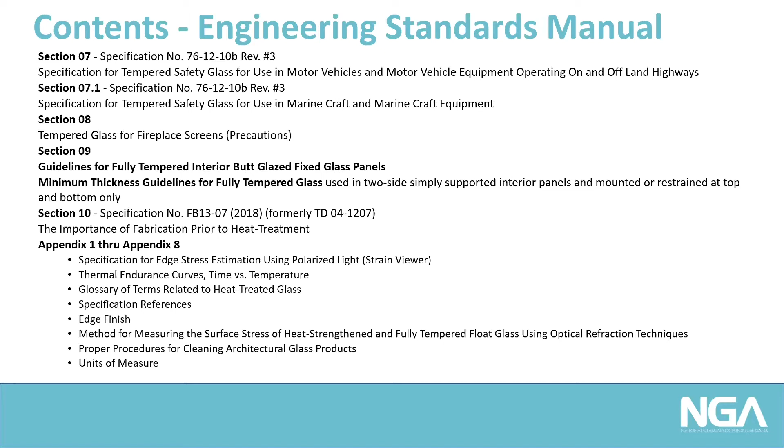The second document to be updated in late 2019 was the Heavy Glass Door Design Guide. Per NGA, the purpose of this design guide is to provide authoritative technical information to designers and to offer some suggestions as to the proper application of heavy glass used in doors and entrances. The last publication of this document is from 1999. After nearly 20 years of task group efforts, the document was updated in 2019.

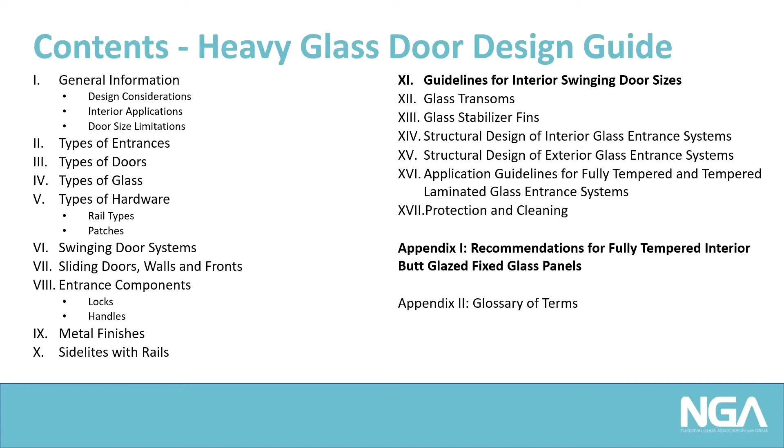So, what were some of the more significant changes to the documents with respect to today's topics, the tech tables? In the Engineering Standards Manual, 2 tables were combined into 1. In this table, joints joined with silicone or permanent clips and open joints are addressed side by side. The deflection criteria for glass linked with clips or silicone joints is now based on 1.5 inches for glass up to 10 feet tall and 2 inches for taller glass.

I have been told the deflection criteria in the previous version was 1 inch. Unlike this version, the deflection criteria was not explicitly defined in that document. Glass linked with clips or silicone joints was reviewed for both the 5 PSF load from IBC 1607 and the 50 pound per lineal foot at 42 inches above finished floor from IBC 2407. Table 1 of the previous edition was based only on the 5 PSF load.

Glass with open joints was reviewed for both 5 PSF load from IBC 1607 and the 50 pound per lineal foot load from IBC 2407. Table 2 of the previous edition was based only on the 50 pound per lineal foot load.

In the Heavy Glass Door Design Guide, laminated glass with patch fittings is now allowed in limited conditions per a footnote. This edition is based on the results of collaborative industry testing. Laminated glass with standard PVB, structural PVB, and ionoplast interlayers were tested and have been deemed acceptable for temperatures of 75 degrees Fahrenheit or less. Additionally, hardware limitations for 5/8-inch glass doors were added to Table 4. The previous table included hardware limitations for 3/8, half, and 3/4 inch glass doors.

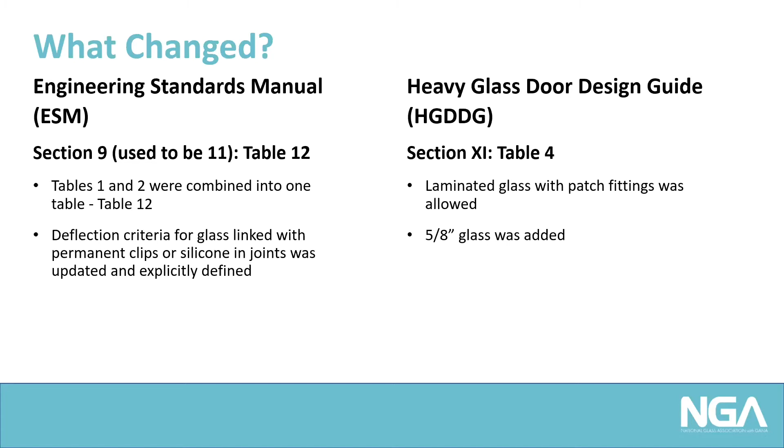Why were these changes made? Well, in Section 9 of the Engineering Standards Manual, the committee made changes in order to define applicable code considerations, provide clarification regarding calculations related to the tabulated recommendations, and to reduce the risk of misuse of tables by combining the information into one table. The tables from the previous document were sometimes being misused, particularly with respect to the open joint condition.

There was a common misconception that GANA recommendations could be used in lieu of BOCA or IBC codes. GANA always noted Table 1 did not meet 2400 of BOCA, which has been replaced by IBC as the model building code. And the intention always was that Table 2 would be used when considering open joints. The designer or user was never intended to make a choice between GANA recommendations and the building code requirements, because they were actually the same in Section 11 of the previous publication.

Table 4 of the Heavy Glass Door Design Guide was updated because there has been an increased demand for laminated glass in interior spaces. Whether for security, acoustic considerations, or other reasons, architects and owners have wanted laminated glass walls and doors. In the past, due to the compressive nature of patch fittings, laminated glass was discouraged or just not offered. After review of the laminated glass and patch fitting test results, the task group members determined laminated glass with patch fittings would be acceptable in temperature-controlled environments.

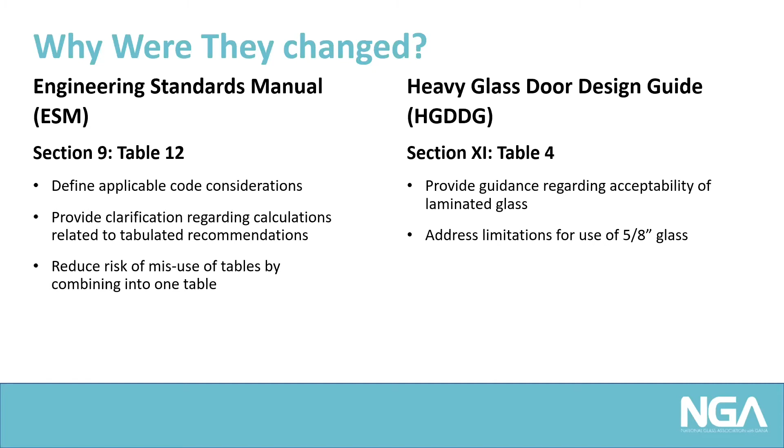What has not changed in these tables and documents? The intent of the recommendations in the Engineering Standards Manual has not changed. When considering interior glass linked with permanent clips or silicone in joints, silicone still cannot be assumed to reduce the deflection or the stress in any panel. Silicone in joints should not be assumed to add to the structural strength or the rigidity of any panel.

The document recommends the panels be clipped together at no more than 4 feet on center to be considered to prevent relative movement between panels. An option does still exist to provide open joints of a width that does not allow fingers to be inserted or trapped.

As before, any open joint between 2 adjacent panels, whether between a door and a sidelight or between 2 sidelights, should still be reviewed for IBC 2407, load of 50 pounds per lineal foot at 42 inches above the finished floor, using a deflection limit of the thickness of the thinnest panel. The previous Table 1 of the GANA Engineering Standards Manual was never intended to be used for open joints.

Table 1 and Table 2 from the previous publication were combined in a side-by-side manner in the new Table 12 in order to present all necessary considerations in one place to ensure that the glass thickness is properly determined. The intent did not change, just the format.

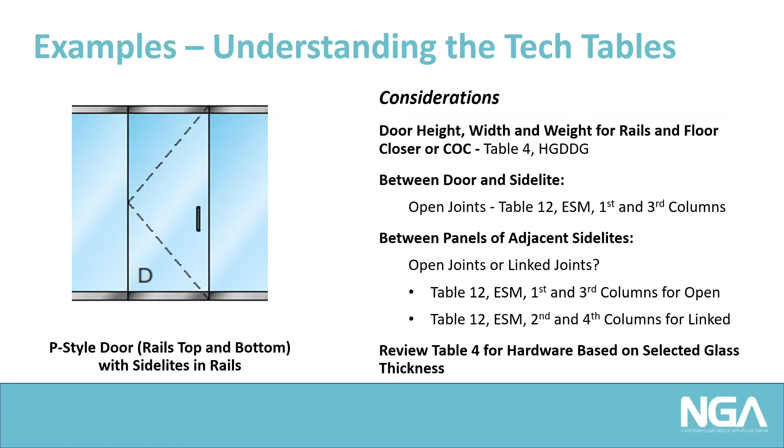Determine the glass thickness for the door and adjacent side lights by finding the worst case thickness in the first and third columns in Table 12 of the Engineering Standards Manual. As with the previous example, if the opening includes a run of side lights beyond the area of the door and you want to consider using a different glass thickness there, review the joints between the adjacent side lights for the height of the opening. Again, refer to the first and third columns of Table 12 in the Engineering Standards Manual if these joints are open. Refer to the second and fourth columns of Table 12 if the joints are linked.

Once again, the glass thickness for the open joint condition between the side light and the door, once this thickness is determined, you should go back to Table 4 of the Heavy Glass Door Design Guide and review the hardware limitations based on the selected glass thickness from the previous steps. If everything still checks out and the patch fitting and closer configuration from the original design works for the glass thickness determined above, you're done. Otherwise, you will have to review Table 4 for an appropriate door and hardware configuration.

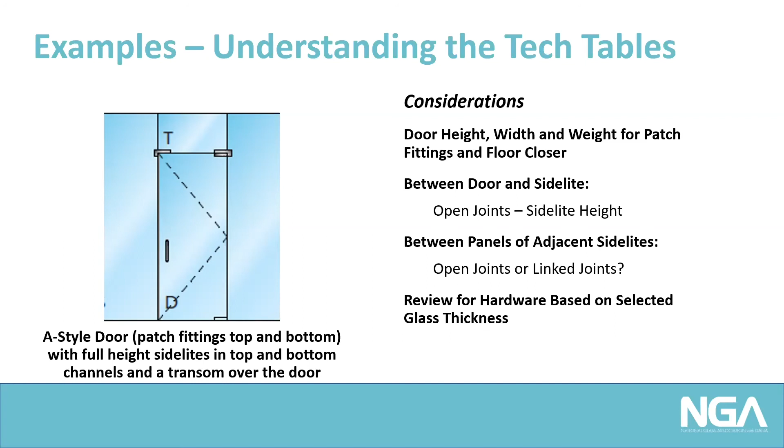And for the last example, we're looking at the most common and most straightforward of the examples, with a glass wall with top channel and bottom rail. For this example, you just need to know whether these are open joints or linked joints to determine the glass thickness recommended. As per the previous examples, refer to the first and third columns of Table 12 in the Engineering Standards Manual for open joints, and refer to the second and fourth columns of Table 12 if the joints are linked.

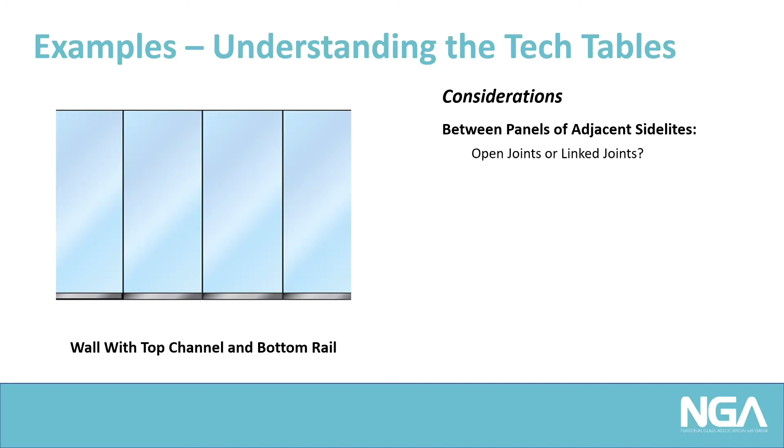Today was really about providing a brief overview of the tech tables related to interior heavy glass doors and walls in the updated NGA documents.

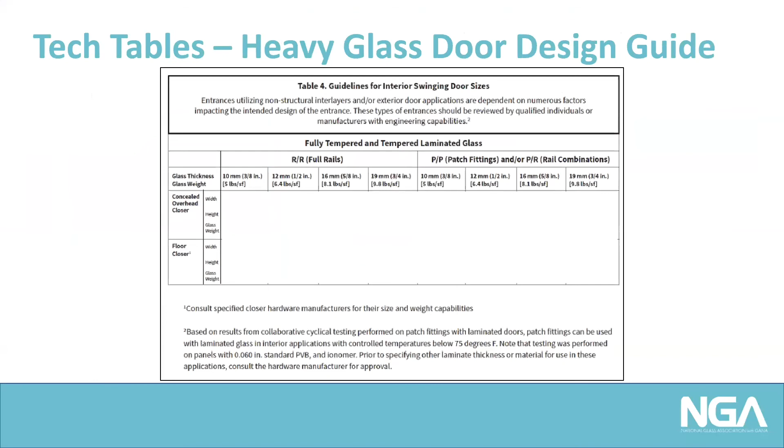At this time, I would like to open this up for any questions. Great, thank you, Melissa. We have received one question, if you wouldn't mind addressing. It is, when reading the table of two-sided support, top and bottom, does the maximum height reference the actual glass height, overall opening height, or unsupported span height?

For the purposes of these tables, you should be considering the overall height. This is based on simple span beams with the assumption that the glass is set in small channels and the glass can rotate somewhat inside it. So for the purposes of these tables, you should be assuming the overall rough opening height from top of channel at the top to bottom of channel at the bottom.

Now, if you want to consider the daylight opening, you would have to contact a structural engineer or a glass engineer who would review the fixity at the top of the bottom channel and the bottom of the top channel. And at that point, you may be able to use the daylight opening, but these tables are not intended to address different fixities. It is intended to address only pinned conditions.